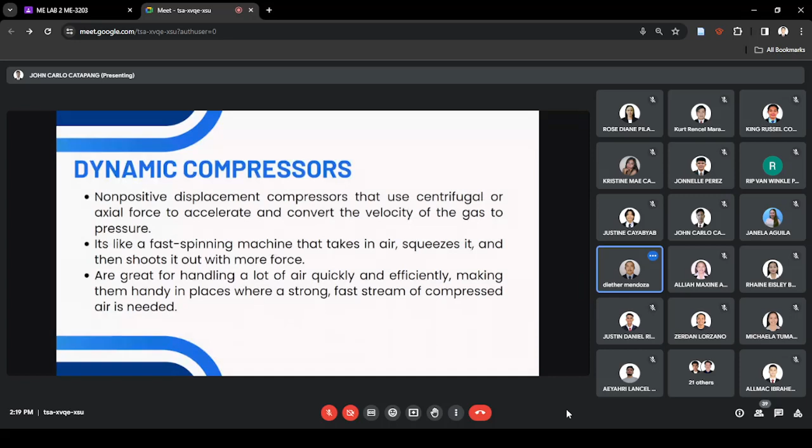First is the centrifugal compressors. A centrifugal compressor is a type of dynamic compressor that uses a rotating impeller to compress air or gas. For reference, you can go to page 108, figure 7.2.

Here's a simple breakdown. First is the impeller - imagine a fast spinning wheel with blades, that's the impeller. When it spins, it pulls in air or gas. Next is centrifugal force - as the impeller spins, it creates a centrifugal force that flings the air outward. Next is compression - the outward flung air is then directed into a diffuser where it slows down and the pressure is increased. This compressed air is then ready for various uses such as powering tools or industrial processes.

Next. Additionally, centrifugal compressors are known for their efficiency and reliability, and they are often used in applications where a continuous high volume flow of compressed air or gas is required. They are used in industries like petrochemical, power generation, and manufacturing.

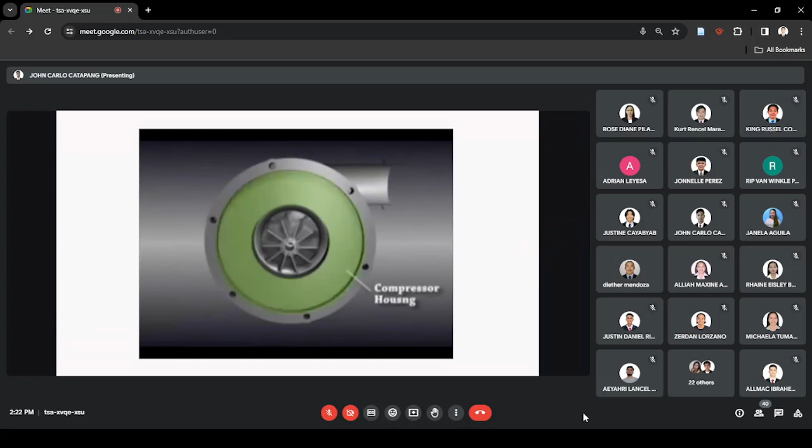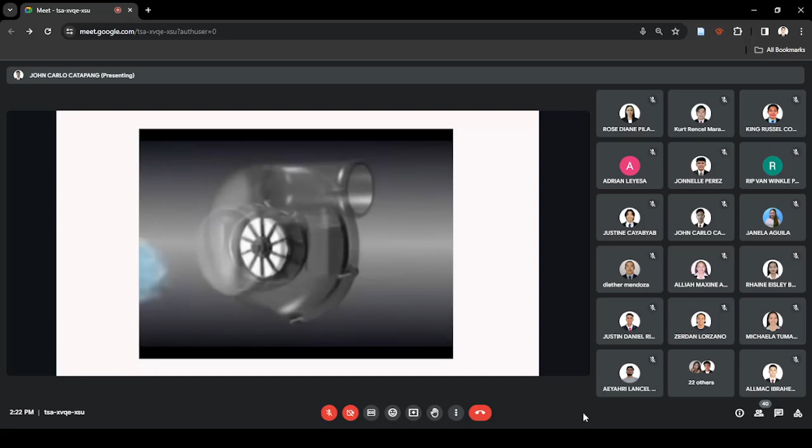And here's some video to explain it further. A centrifugal compressor is comprised of the following key components: compressor housing, impeller, ambient air inlet, outlet. A centrifugal compressor uses an impeller to draw in gas at the hub and accelerate it radially by centrifugal force through a circular looped housing. The housing acts as a diffuser that converts high-speed, low-pressure air leaving the impeller to high pressure, low speed air.

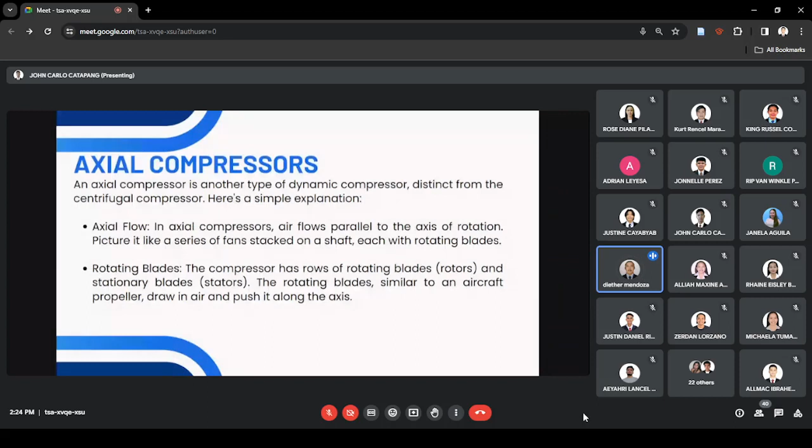Rotating blades: the compressor has rows of rotating blades called rotors and stationary blades called stators. The rotating blades, similar to an aircraft propeller, draw in air and push it along the axis.

Compression stage: axial compressors often have multiple stages, with each stage consisting of a set of rotating and stationary blades. As air passes through each stage, it gets compressed further.

High efficiency: axial compressors are known for their high efficiency, especially in applications where a continuous and high volume of compressed air is required. To add more, axial compressors are commonly used in aircraft engines, power plants, and certain industrial processes where a streamlined and efficient flow of compressed air is crucial.

However, it's not used as frequently as the reciprocating and centrifugal compressors because of its high initial and maintenance cost. All compressors can be rated by dividing discharge pressure by the suction pressure, and this is called the compression ratio. And here's another video to explain it further.

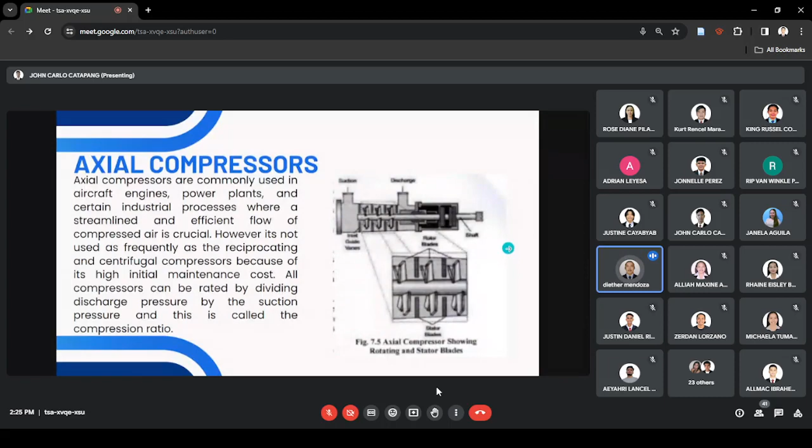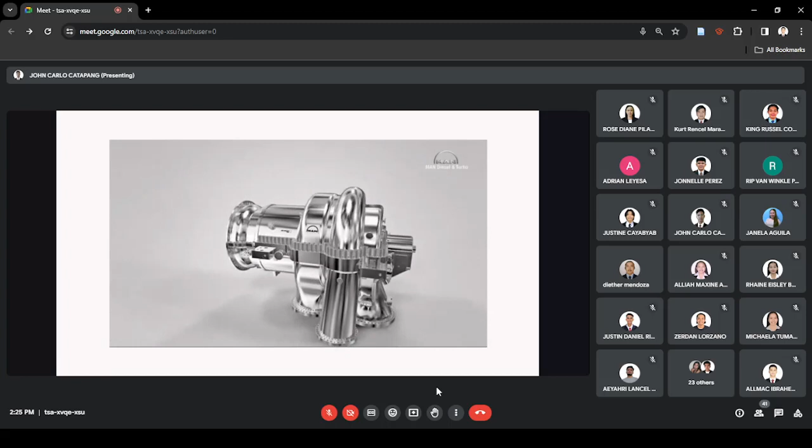MAN Diesel and Turbo is the world's leading supplier of industrial axial flow compressors. Various types of axial flow compressors are available to meet the specific requirements of different industrial sectors. Depending on the frame size, a single axial flow compressor may have a suction capacity of up to 1.5 million cubic meters per hour and be able to compress this flow to a maximum pressure of 25 bar. For example, all the air inside the Cologne Cathedral, which at 516 feet is the third tallest church building in the world, could be exhausted in around 16 minutes.

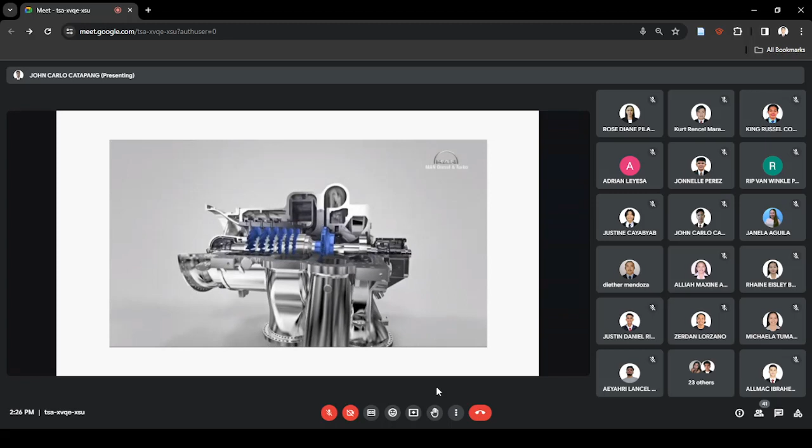The basic design of an axial flow compressor is similar to that of a fan. Blades are mounted around a shaft. In order to increase the effect, several of these blade rows are arranged axially, one behind the other. This axial stage group is often combined in a machine with one or more downstream radial stages in order to further increase the discharge pressure. A compressor of this type, such as the AR MAX1 shown here, is known as an axial radial compressor. The axial and the radial part are mounted on a common shaft, and the gas, normally air, flows through them in turn. An intercooler can be installed in between, which increases the efficiency of the compression process.

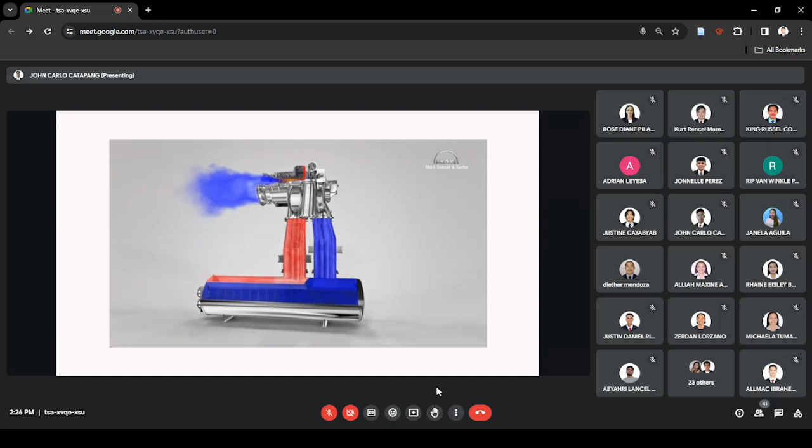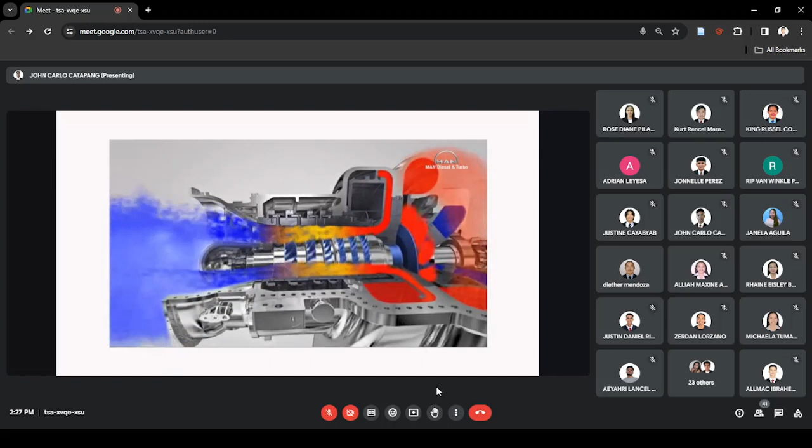Let's now take a look at the axial stage group. As they rotate, the blades strike the gas, guiding it backwards and also compressing it. This process generates a flow along the axis. That's why the machine is called an axial flow compressor. The outlet casing guides the compressed gas to the outlet nozzle.

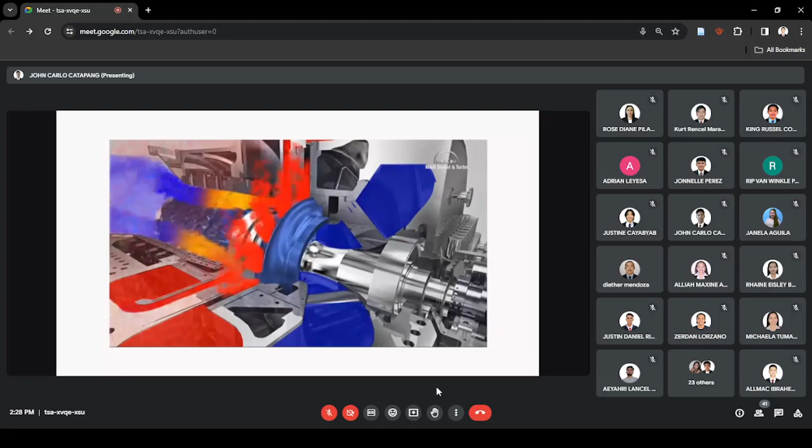Compression raises the temperature of a gas, which in turn somewhat reduces the density and increases the volume. As the downstream compression process would require more energy, the intercooler reduces the temperature of the gas before it enters the radial part. Axial flow compressors are able to compress extremely high volume flows, but the maximum feasible pressure ratio is limited. On the contrary, centrifugal compressors can only process lower volumes, but deliver higher pressures. Since the gas in the AR MAX1 has already lost sufficient volume through compression in the axial part, the downstream radial part is perfectly suited for bringing the gas to a high discharge pressure.

MAN Diesel and Turbo has been designing and manufacturing axial flow compressors since 1950, either in air separation, nitric acid production, as blast furnace blowers, or in refinery applications. These machines have been verified hundreds of times and proven over decades.

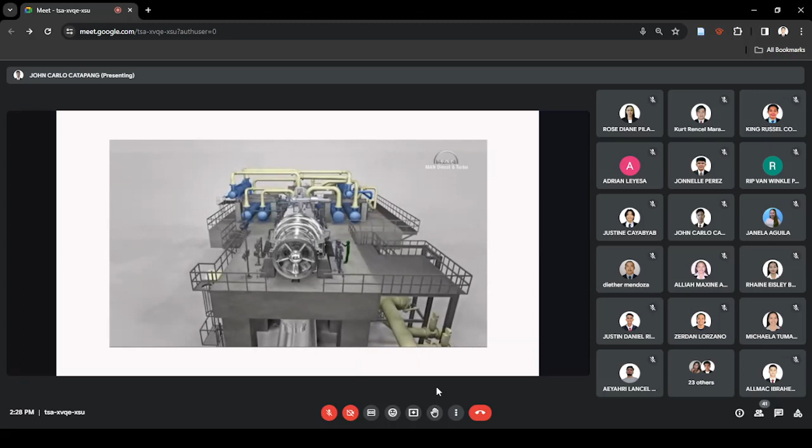Coal liquefaction is a future-oriented application that extracts synthetic fuels and other chemicals from coal. The process requires large amounts of oxygen. Large air separation units are therefore becoming increasingly important. To extend its leading position in this area, MAN has developed AirMax.

This compressor train consists of an AR MAX1 axial flow compressor as a main air compressor, an integrally geared centrifugal compressor, and a driving steam turbine in the middle. In its blading, AR MAX1 combines for the first time the benefits of conventional industrial compressors with those of aero engine compressors. This makes it extremely robust, as well as uniquely compact and efficient.

Next is the ejector, a device used to suck gas or vapor from the desired vessel or system. It is similar to a vacuum pump or compressor, but without the need for mechanical parts. Here is a simple illustration of the ejector.

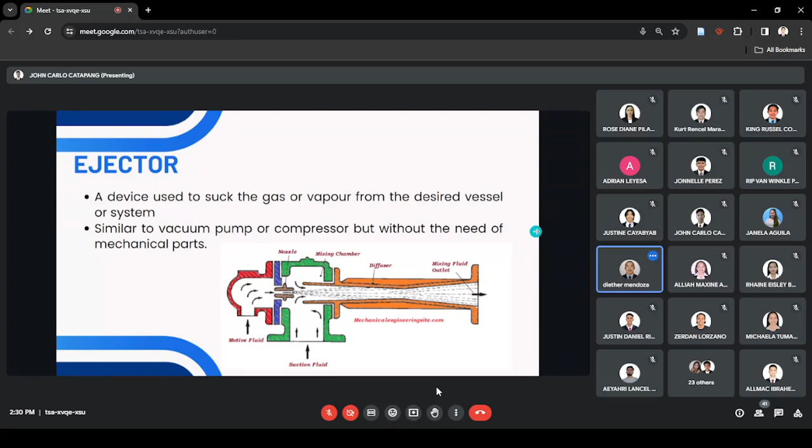An ejector is a device that uses a high-speed fluid, such as a gas or liquid, to create a low-pressure region and entrain another fluid or substance into the flow. Here's a simple breakdown: high-speed fluid flow - the ejector typically has a nozzle through which a high-speed fluid is expelled. This fluid can be steam, air, or another gas or liquid.

Next is the low pressure zone. As the high-speed fluid exits the nozzle, it creates a region of low pressure. This low pressure zone is where the ejector draws in another substance. Next is entrainment - the low pressure zone induces the flow of another fluid or substance, usually a gas or vapor, from the surrounding environment into the ejector.

Next is mixing and discharge. The entrained substance mixes with the high-speed fluid, and the combined flow is then expelled from the ejector.

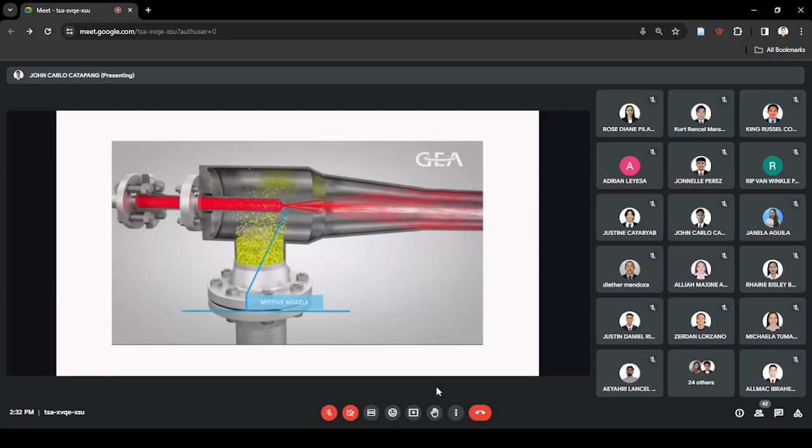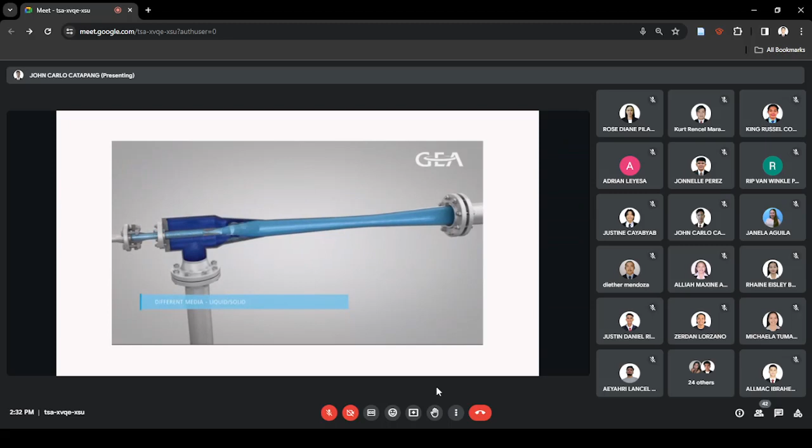The operational principles of jet pumps, also referred to as ejectors, is simple. The pumping effect is achieved using a motive medium, such as a gas flow. This generates a dynamic pressure drop in the motive nozzle. The resulting negative pressure accelerates the suction medium by impulse transmission in the mixing nozzle and pulls it along. Their simple technical design without moving parts makes jet pumps specially robust and low maintenance. The process works with gaseous and liquid media and, depending on the design, is capable of transporting gases, liquids, and even solids. Depending on the specific application, GEA produces jet pumps from various materials. We use different types of steel, plastic, graphite, and other special materials.

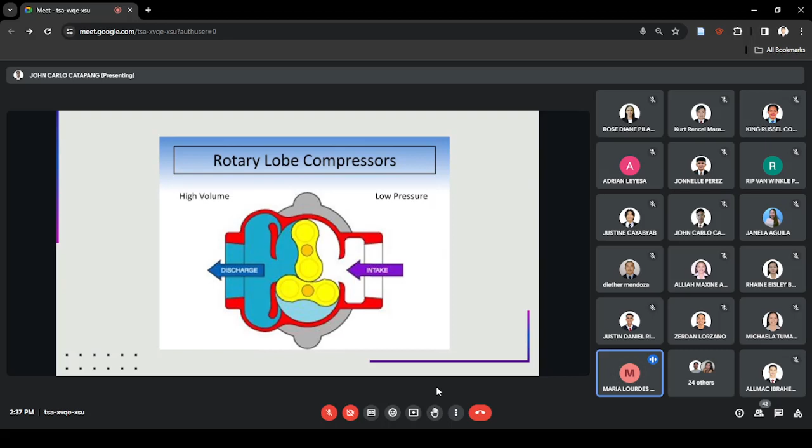Ayan, yun po yung example ng rotary lobe compressors. So sa lobe compressor naman po, nagko-consist siya ng two lobes na nagsiserve as their gears para mag-compress nung air or gas, yung yellow na part.

Another type ay rotary screw compressors. Rotary screw compressors utilize two helical screws or rotors rotating inside a cylindrical housing to compress air or gas. As the screws rotate, the air or gas is trapped in the spaces between the screws and the housing, forming a compression chamber. The volume of this chamber decreases as the screws continue to turn, compressing the air or gas. Finally, the compressed air or gas is discharged through an outlet port.

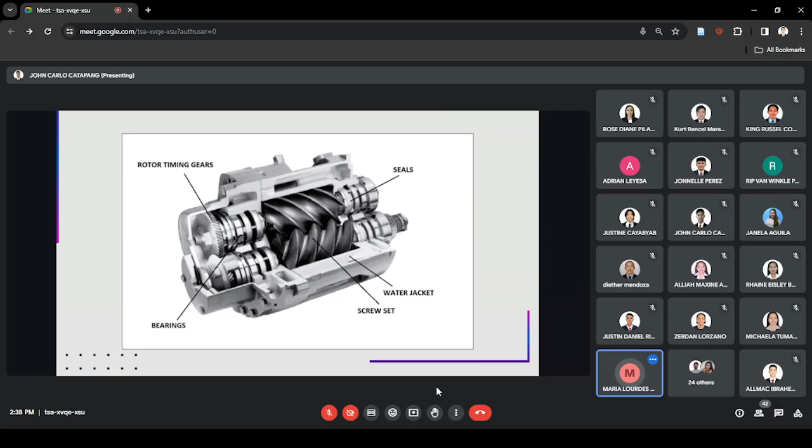So ito po, picture ng sample ng rotary screw compressor na may dalawang screw, which is also called the rotor. Yung isang rotor ay tinatawag na male rotor, at yung isa naman ay female rotor. Kaya sila tinawag na male and female kasi match or fit sila to work and to compress air or gas.

Another type is the liquid ring compressor. A liquid ring compressor uses a rotating ring of liquid, typically water, to compress gas or vapor. Inside the compressor, a cylindrical chamber is partially filled with the liquid, forming a rotating ring due to centrifugal force. Gas or vapor is drawn into the compressor, where it is entrained by the rotating liquid ring and compressed as it travels through the chamber. The compressed gas or vapor is then discharged at a higher pressure.

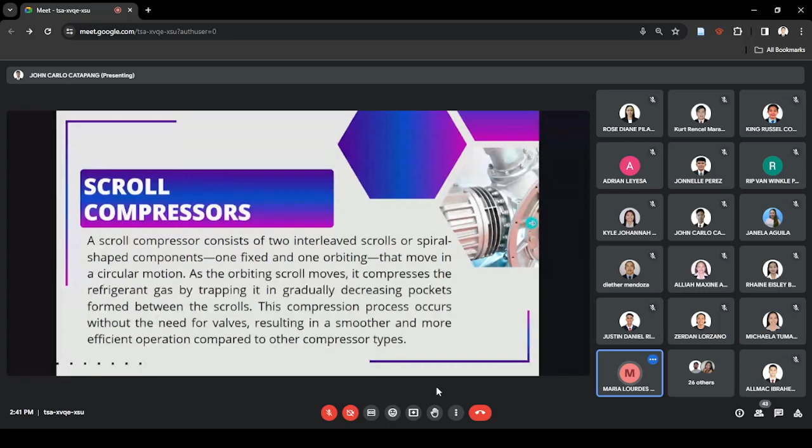So this is one example ng scroll compressor. Dito makikita natin na may dalawang scroll, yung fixed at yung isa ay yung orbiting scroll. Yung fixed scroll ay nakakabit sa loob ng compressor housing. Tapos yung orbiting scroll, siya yung umiikot ng circular motion na may connection dun sa fixed scroll. Habang umiikot yung orbiting scroll, lumiliit yung spaces between them, then nako-compress nila yung gas sa loob. And that's all for the different types of rotary compressors.

So, under pa rin ng positive displacement ay yung reciprocating compressors.

Reciprocating compressors, the term reciprocating refers to the back and forth movement of the compression device. Either a piston or other device is positioned in a cylinder. Ang keyword lang dyan is yung back and forth movement, which means merong intake stroke at yung outward stroke, wherein sa intake stroke, magdodraw ng gas into the chamber, then sa outward stroke naman ay magdi-discharge ng na-compress na gas. Ang idea rin ng reciprocating compressors is yung piston mag-receive ng power or force from the drive shaft and then ita-transfer nito yung power dun sa gas na iko-compress natin.

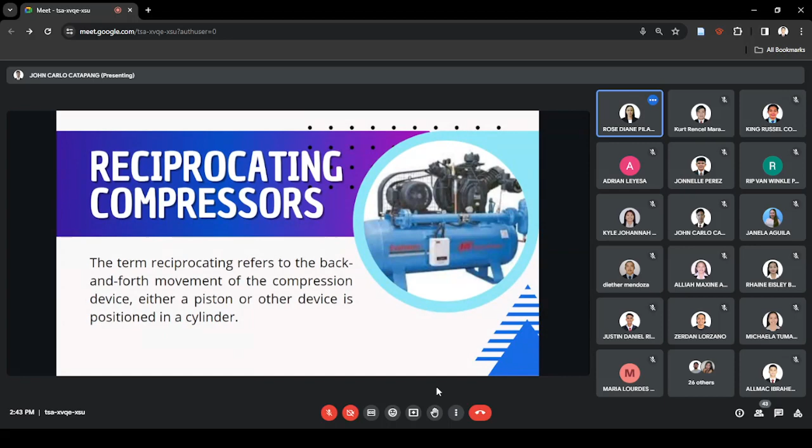Under reciprocating compressors are piston type compressors. Piston type compressors are the oldest and most commonly used compressor in the pneumatic industry because of its flexibility, high pressure capability, ability to rapidly dissipate heat of compression, and oil-free operation. They are built for either stationary or portable devices.

The idea in piston type is that the gas is trapped between the piston and cylinder head, and then it is compressed. To further explain, next slide.

There are two types of piston type: single acting and double acting compressor. In single acting, only one side of the cylinder compresses the gas, whereas in double acting, compression happens on both the outward stroke and the inward stroke.

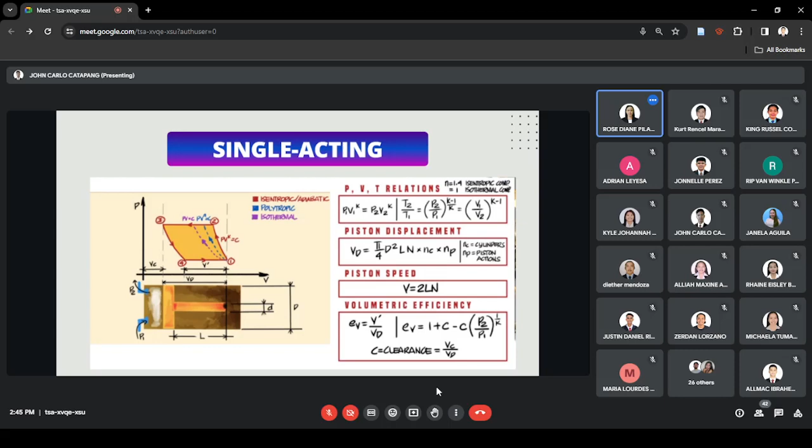When our piston moves down, it creates a vacuum in the cylinder which draws in gas from the inlet valve. Then when our piston moves up, the gas is compressed and pressure builds up. When the pressure rises, the outlet valve opens and our compressed gas exits the cylinder.

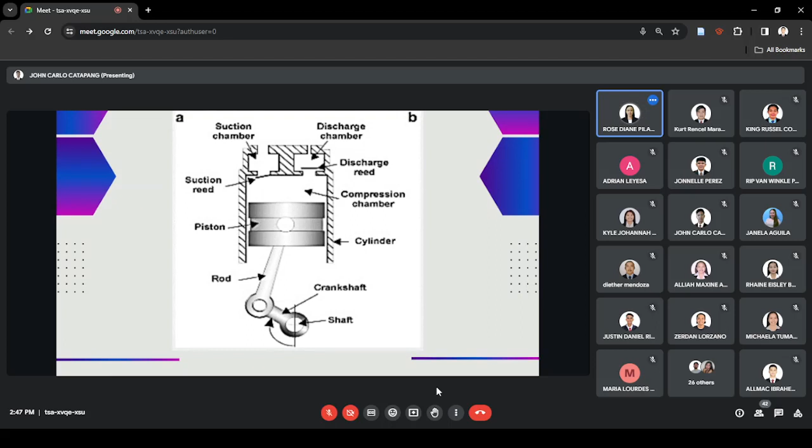Another type under reciprocating compressor is the diaphragm. The idea here is that it uses a flexible diaphragm to compress gas, made out of flexible materials such as plastic or rubber. Its application is for pharmaceuticals, medical, and laboratory use. The diaphragm acts as a barrier to prevent contamination of our gas from our drive mechanism, which is why it's applicable to pharmaceuticals since gas purity is critical there.

During the suction stroke, of course, air is taken in. The compensating pump delivers a low quantity of oil through the check valve towards the oil head. Then the piston ring leaks and the membrane approaches the oil head so that air can enter.

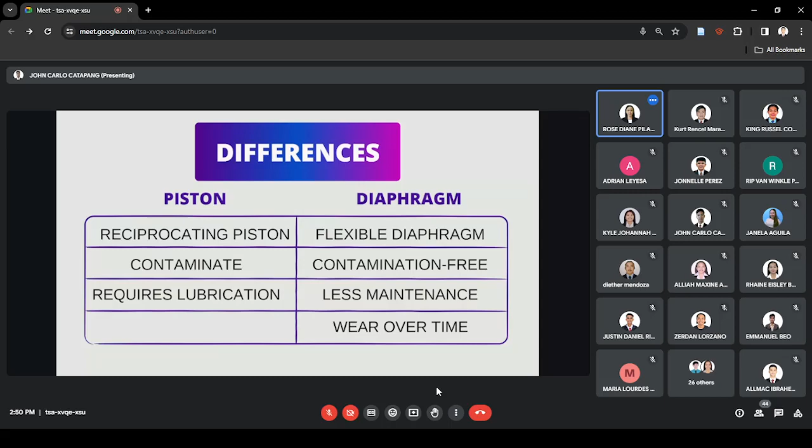For piston type, lubrication is required. For diaphragm, it requires less maintenance since lubrication isn't needed and the gas doesn't come in contact with the drive mechanism. However, the diaphragm wears over time, so it needs to be replaced periodically.

So, the other type is our trunk compressor. This type of compressor has a single acting cylinder and is limited to refrigeration service and to smaller air compressors. Here, the piston is directly connected to the connecting rod, so the limitation on rotational speed is less restricted, allowing higher speed.

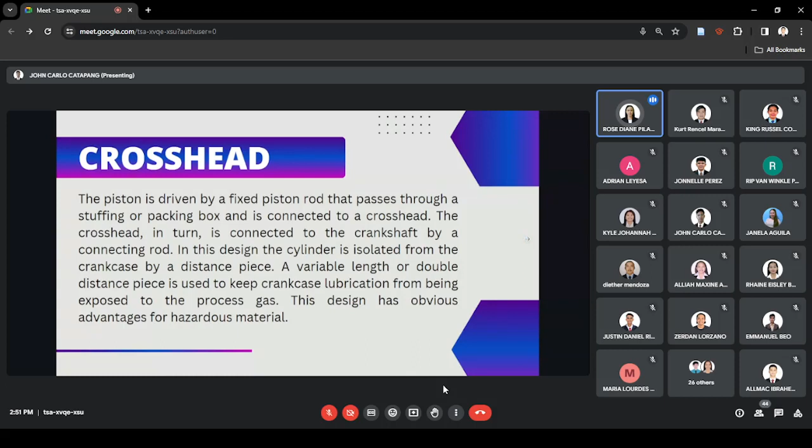For crosshead type, the piston is driven by a fixed piston rod that passes through a stuffing or packing box and is connected to a crosshead. The crosshead in turn is connected to the crankshaft by a connecting rod. So if earlier in trunk type the piston is directly connected to the piston rod or connecting rod, here in crosshead there's an additional component, the crosshead, that links the piston and the connecting rod.

The crosshead also provides the compressor with greater stability, providing less vibration and less piston ring wear and tear, thus allowing a double acting design instead of the single acting design in trunk type.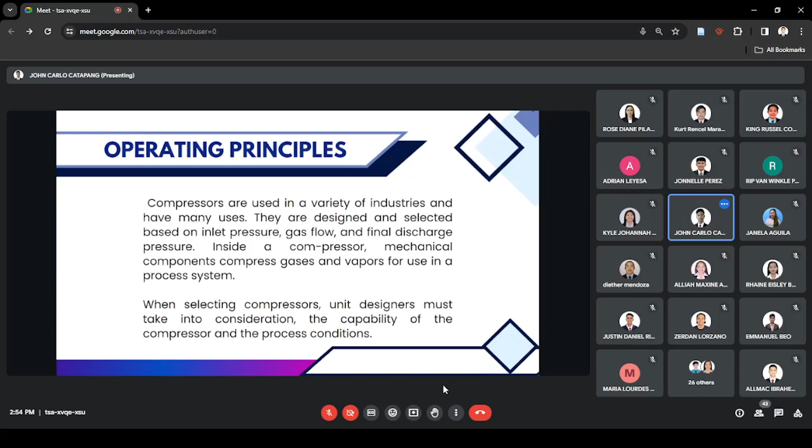Single stage versus multi-stage compressor. First is the single stage compressor. In a single stage reciprocating compressor, all the compression process takes place in only one cylinder. Two valves connect with the cylinder: one is an inlet or suction valve, and the other is an outlet or delivery valve. The opening and closing of a spring or plate valve vary based on the pressure difference. When mechanical valves are used for suction and discharge, their function is controlled through cams.

So in the single stage compressor, as Master Dian mentioned, here's the process of the piston. Once the piston slides down from TDC or the top dead center, the inlet valve opens and gases enter. Once there are gases in the cylinder, the piston slides up and compresses the gases into high pressure and high temperature. Once compressed, it exits through the outlet valve.

At saka outlet valve, nakakonekta ito sa ating storage tank. Paulit-ulit lang yung process hanggang sa mapuno na yung ating storage tank.

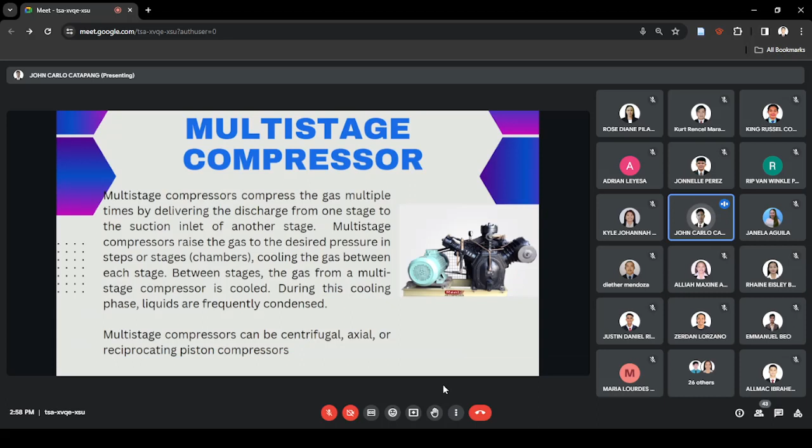Multi-stage compressor can be centrifugal, axial, or reciprocating piston compressor.

Centrifugal compressor performance curve. Para mas lalo nating maunawaan itong pag-monitor sa ating performance curve, ito ay dito.

Pressure, temperature, compressibility, molecular weight, and specific heat ratio of the gas at the compressor inlet and the machine's rotational speed affect the operating performance of centrifugal compressors.

For example, a compressor receiving inlet air at atmospheric conditions will develop higher discharge pressure on cold days than on hot days at a given rotational speed and inlet volume flow. The power requirement also will be higher.

Changes in atmospheric conditions such as relative humidity and barometric pressure will affect performance, although these factors are usually less significant than inlet temperature. We can account for these changes and others encountered during operation by modifying the performance curve of the compressor.

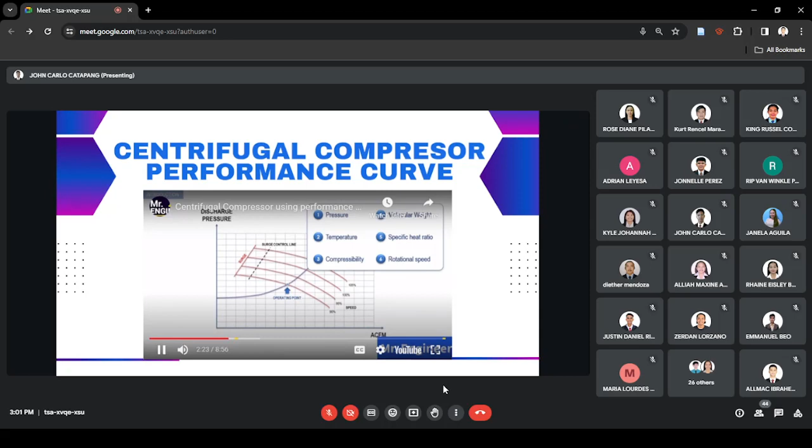In this section, we will develop application procedures for modifications to the performance curve for a single-stage centrifugal air compressor. Of course, these procedures are valid for any gases and for multi-stage centrifugal compressors with somewhat reduced accuracy as the number of stages increases.

Ang purpose nga ng ating pag-track ng performance curve ay para ma-monitor ng ating mga engineer kung may problema ba yung ating compressor, para malaman kung may singaw ba yung mga piston, kung may crack ba yung ating cylinder, at para matrack nga kung kailangan na bang palitan o kailangan na bang ayusin yung ating mga compressor. Yun yung purpose ng pagmo-monitor sa performance curve.

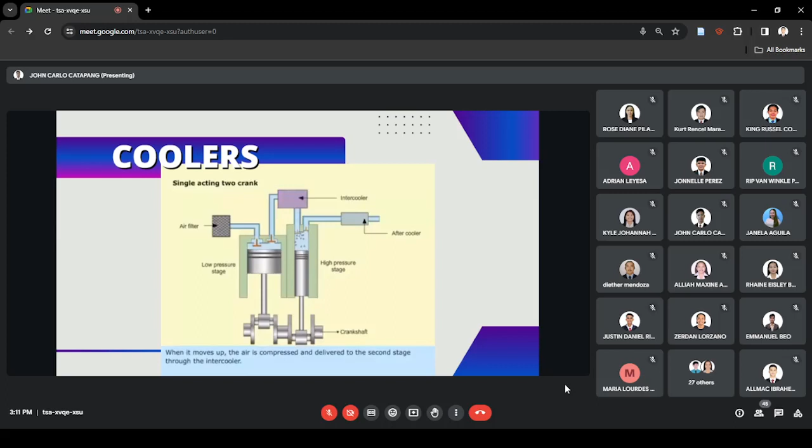In a single acting, two crank compressor, the low pressure and high pressure pistons are connected to two separate cranks. As the low pressure piston moves down, air is inducted through the air filter. When it moves up, the air is compressed and delivered to the second stage through the intercooler. The air is further compressed in the second stage and high pressure air is delivered through the aftercooler.

In a double acting compressor, compression takes place during the upward as well as the downward stroke of the piston. In this arrangement, the low pressure first stage piston is at the top and the high pressure piston is at the bottom. In the first stage, as the piston moves up, air is compressed and inducted into the second stage. When the piston moves down, the pressurized air is further compressed in the second stage. In the meantime, the low pressure stage inducts fresh air from atmosphere through an air filter. In this way, the process is cyclical.

In three-stage compression, the air is inducted at the first stage, compressed, cooled by the intercooler, and delivered to the second stage. In the second stage, the air is compressed further and delivered to the third stage. In the third stage, air is compressed to the required pressure and delivered through an aftercooler. When the piston moves up, air is compressed in the first and third stages, whereas air from the first stage is inducted into the second stage.

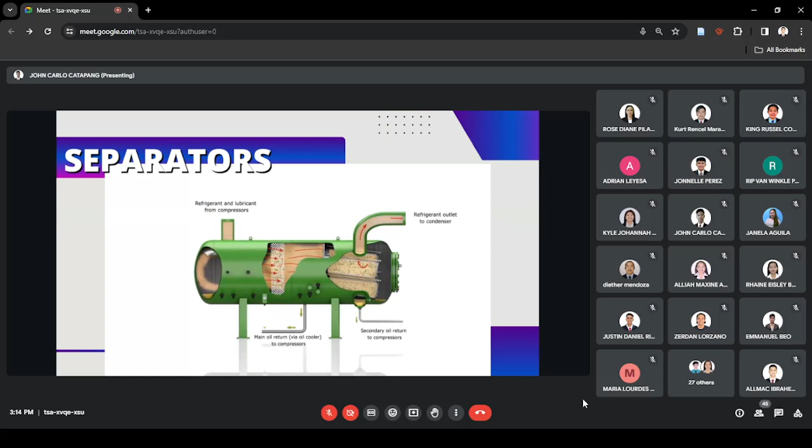Refrigeration oil is primarily separated in the first separation stage, thanks to centrifugal and gravity principles, which ensure maximum performance at both nominal and partial load. A second separation action then takes place in the demister section. Finally, a group of highly efficient coalescent filters provides the last step of oil separation.

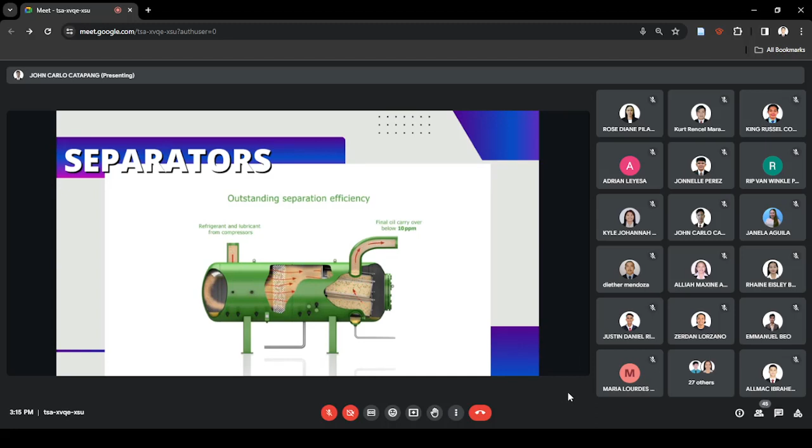Thanks to multi-step separation, the oil separator ensures outstanding separation efficiency. With a tested final oil carryover rate below 10 ppm, the oil separator ensures optimal compressor operation and minimum oil consumption. Optimized oil charge amounts and a service flange for simple filter replacement round off the benefits of the OAHC oil separator.

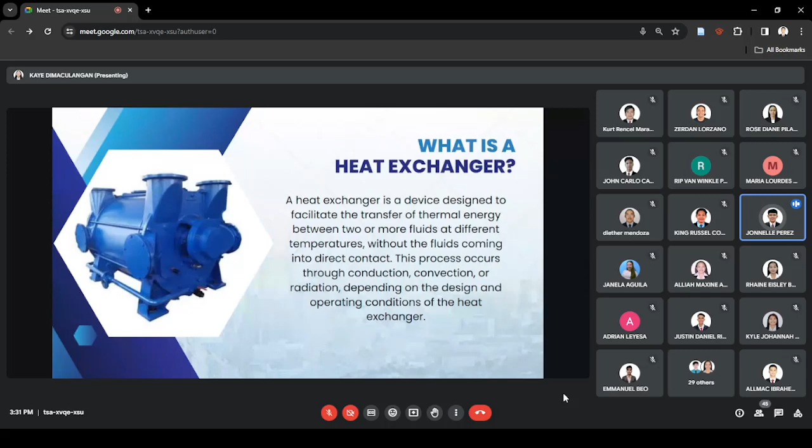And the purpose of the heat exchanger. Let's start with the purpose, which includes temperature control, energy efficiency, heat recovery, condensation and evaporation, and space heating and cooling.

For temperature control, our heat exchanger is in charge of temperature regulation in a process. This can be in industrial processes or any process or system that uses heat exchangers. The main job of heat exchangers in temperature control is to reach and ensure optimal operating conditions and maintain product quality in a system or engine.

Next naman po ay sa energy efficiency. Ang ating heat exchanger ay nagre-recuperate ng mga wasted heat mula sa ating exhaust streams or hot fluids na itinatransfer sa ating colder fluids. Ang heat exchanger po ay nagko-contribute sa energy conservation o kaya naman po ay pag-i-improve ng efficiency ng ating system o kaya naman po ay machines.

Next is heat recovery po. Kagaya rin po na na-mention sa ating energy efficiency, ito po yung pagre-recuperate ng wasted heat kung saan nare-recover natin yung thermal energy from the outgoing streams ng ating systems, kung saan nare-reduce po nito or nakaka-help po to ma-reduce ang energy consumption at saka operating costs ng isang system.

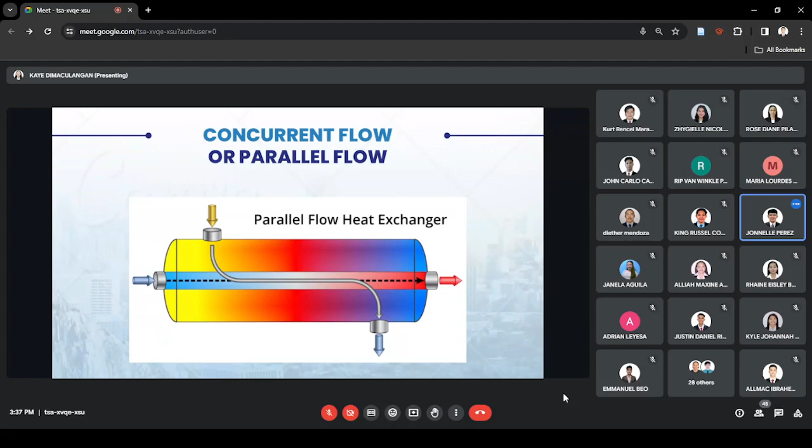Next naman po ay ang cross flow.

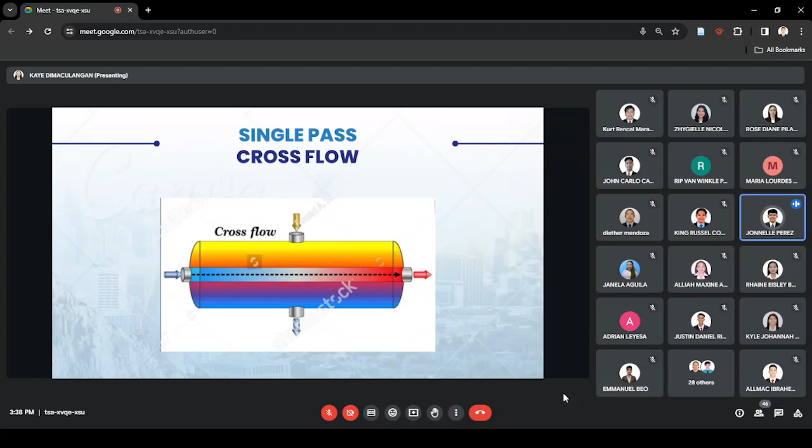Next naman po ay multi-stream flow or multi-pass cross flow. Sa isang multi-stream flow po, there are multiple streams. Kumbaga po ay iba't iba po ang makikita natin na flow configuration dito. Maaaring andito po lahat yung nabanggit kanina, which is yung parallel flow, counter flow, o kaya naman po yung single pass cross flow. So ito lang po ay parang incorporation ng unang tatlong flow configuration po ng ating heat exchanger sa isang device.

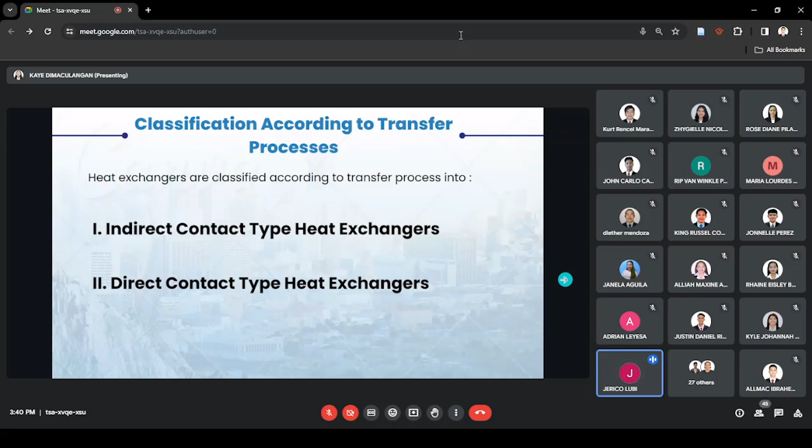The indirect contact heat exchanger operates by keeping the fluid stream separate while facilitating heat transfer through an impervious dividing wall or by transferring heat into and out of a wall in a transient manner. This means that the fluids involved never directly come into contact with each other during the heat exchange process.

Bale, ang tatandaan lang dito, separate fluid streams. Ang fluid ay segregated through the process. Hindi nagkakaroon ng direct contact ang two fluids sa heat exchange process. Tapos, impervious dividing wall, ito ay barrier na nag-aallow sa heat to pass from one fluid to other na hindi sila nagmi-mix.

Tapos, transient heat transfer. In some cases, the heat transfer might occur into and out of the wall in a transient manner. This means that the heat is absorbed or released by the walls, which then transfer it to the other fluid without direct contact between the fluids.

Next po. Ang sumunod naman ay direct contact type. Dito naman, ang two fluids ay nagda-directly touch each other to exchange heat. They are often used in processes like evaporation or cooling, where changing from liquid to gas or vice versa. Ang mga exchangers na ito ay nagtatransfer ng heat ng mas mabilis at hindi masyado expensive i-build. Pero since ang dalawang fluids ay nagda-directly touch, ito ay magagamit lang sa mga pwedeng gamitin na sitwasyon.

Sinasabi lang dito na ang classification according to process function, categorized heat exchanger ay naka-base sa specific roles in the thermal process kung saan ang condenser ay pang-convert ng vapor to liquid, heaters for increasing fluid temperature, coolers for reducing fluid temperature, and chillers for precise and low temperature cooling application.

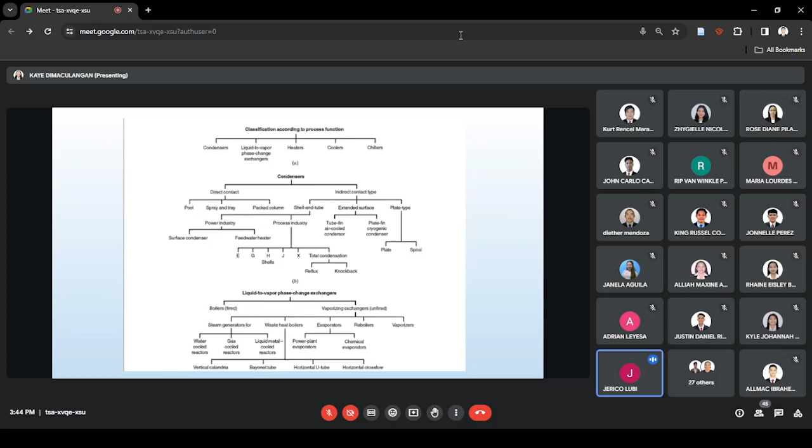Classification of heat exchanger by construction type. Heat exchangers can also be classified according to their construction features, for example, tubular, plate fin, tube fin, and regenerative exchangers.

Tubular heat exchangers are versatile and typically use circular tubes, but other shapes like elliptical or rectangular tubes can also be used. The design can be easily adjusted by changing tube size and layout. They are excellent for handling high pressure and pressure difference between fluids.

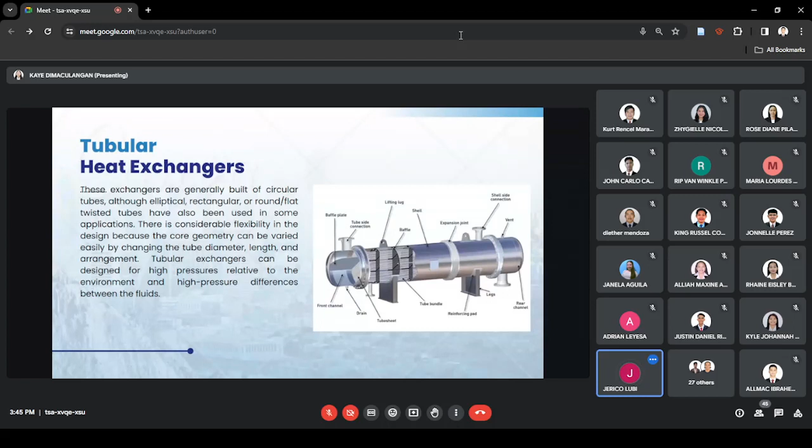Shell and tube heat exchangers will look something like this. With this design, we normally have for the heat exchanger what is known as the header. Then we have another inlet and outlet for fluid 2 on the main body known as the shell. Inside the unit we have the tubes. These bend and loop around to start and finish at the tube plate, which sits between the shell and the header. The tubes will usually also pass through some baffles, which are sheets of metal. We will see how these work in just a moment.

The header, as well as the tubes, can be removed for cleaning, repairs, and maintenance. Inside the header is a sheet of metal known as the divider, or the partition. This separates the tube ends, enabling the fluid to flow into and then out of the heat exchanger tubes.

Fluid 1 will flow through the header, into and around the tubes, then back to the header. Fluid 2 will enter the shell and surround the outside of the tubes. The baffles will partially block the flow, which will force the fluid to turn multiple times. This creates a turbulent flow and ensures that fluid 2 mixes with itself, which ensures maximum heat transfer.

For example, we might find this in a pharmaceutical factory with a boiler providing steam into the shell, which surrounds the tubes. A chemical product is then pumped through the tubes, and this absorbs the heat of the steam through the tube wall. So this product is going to exit the heat exchanger much warmer. Meanwhile, the steam will start to condense into a liquid and flow back to the boiler to pick up more heat and repeat the cycle.

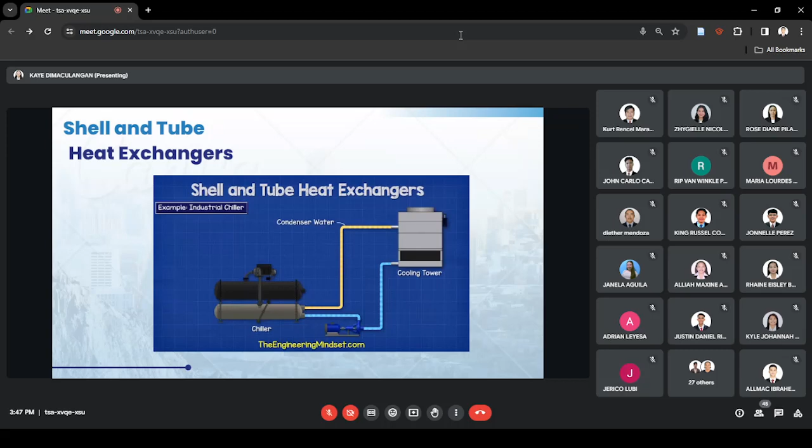Additionally, these are used in refrigeration applications, like this industrial chiller. We have the water flowing through the tubes, and the hot refrigerant in the shell. The water will absorb the heat of the refrigerant so that it can transport this to the cooling tower, where it will be rejected into the atmosphere. The water returns cooler to pick up more unwanted thermal energy from the chiller.

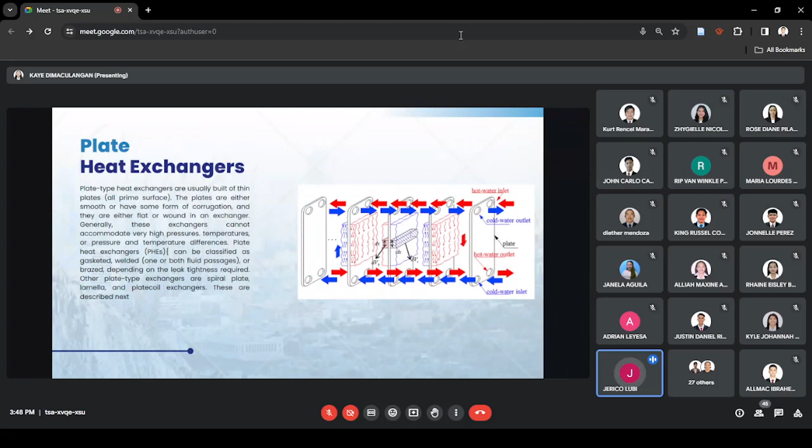Gasketed ones have flexible seals and are easy for cleaning. Welded ones are durable for higher pressure, and brazed ones have strong bonds between plates. Other types include spiral plate, lamella, and plate coil, each having its own advantages.

Another type is the plate fin heat exchanger. This is a device used to transfer heat between two fluids and consists of alternating layers of flat plates and corrugated fins, providing a large surface area for heat transfer. The fluids flow in separate channels formed by the plates and fins, with the heat transferred between them through the walls of the plate. The plate fin heat exchangers are favored for their high efficiency and compact design, making them suitable for various applications like aerospace, automotive, and HVAC systems.

As for its working principle, there are two fluid flow streams, typically hot and cold fluid, and they will enter the heat exchanger through separate channels. Heat is transferred between fluids through the thin fins and connected plates, and the large surface area of the fins facilitates efficient heat transfer. The plate fin heat exchangers often use a counterflow arrangement in which the hot and cold fluids flow in opposite directions. This arrangement gives higher efficiency to the heat transfer.

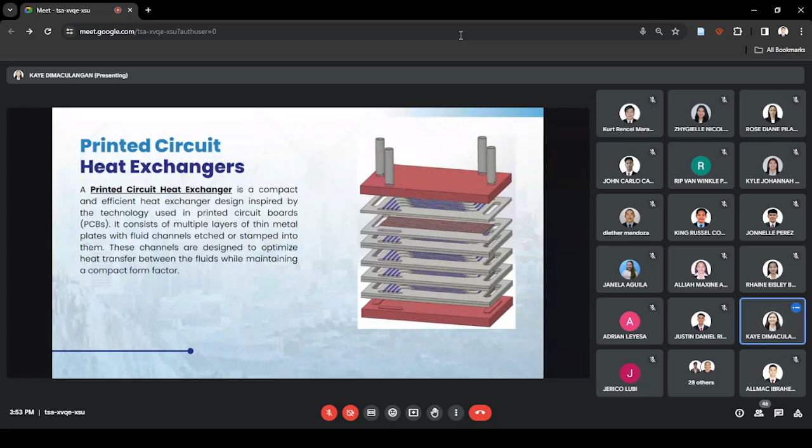Heat transfer occurs as the fluid flows through the channels within the printed circuit board. The close proximity of fluids within the microchannels enhances the convective heat transfer between them, allowing efficient thermal energy exchange. Printed circuit heat exchangers are commonly used in aerospace, automotive, and chemical processing industries. And last is the regenerative heat exchanger.

It is a type of heat exchanger that uses a matrix or bed of material with high heat capacity to transfer heat between two fluid streams. It operates in cycles, with one fluid stream passing through the matrix absorbing heat while the other fluid stream passes through and releases heat into the matrix. Then in the next cycle, the roles of the fluids are reversed. This allows for efficient heat exchange between the two streams with minimal temperature difference.

The heat transfer process occurs in cycles, typically in a counterflow arrangement. Then the roles of the fluid streams are reversed, allowing for efficient heat exchange with minimal temperature difference between the streams. Its application is used where energy efficiency and heat recovery are critical, such as in industrial processes, power generation, and HVAC systems.

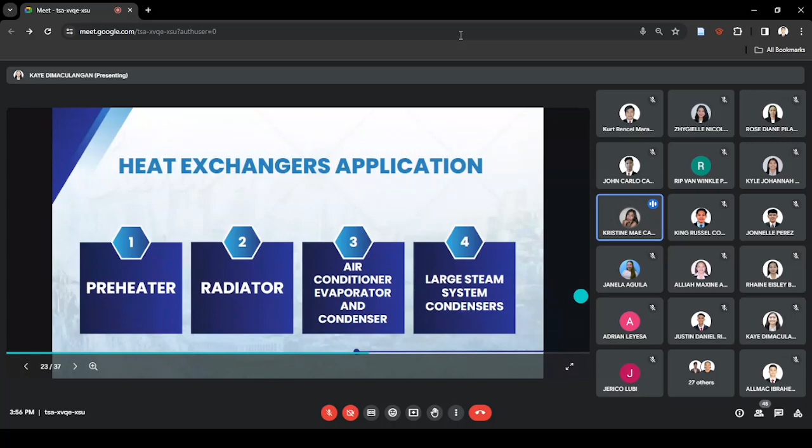For application sa preheater, ang preheater sa isang heat exchanger ay isang stage o component within the heat exchange system responsible para mapataas ang temperature ng fluid bago ito pumasok sa primary heat exchange process. In simple terms, parang warm-up stage para sa fluid to increase the temperature at ma-prepare for more efficient heat exchange within the main part of the heat exchanger.

Ina-ensure sa stage na ito na nasa appropriate temperature ang fluid bago pumasok sa main heat exchange section ng system to help optimize the performance. Sa mga large systems o any process na kailangan ng high temperature, common practice na mag-preheat muna in stages ng fluid for more efficient transfer of energy from the heat source to the fluid being heated.

For example, dito sa U-tube feed water heat exchanger, which is a type of heat exchanger na kadalasang ginagamit sa mga steam power plants or industrial boiler, and also classified as a preheater, ang function nito ay ma-preheat muna yung feed water bago pumasok ng boiler from ambient temperature to required boiler temperature.

Ang process nito ay yung steam ay papasok sa top ng heat exchanger surrounding the tubes, and habang dumadaloy ang steam around the tubes guided by baffles para sa path ng flow na parang pa-curve, ita-transfer ni steam ang thermal energy to the cooler tubes para ma-condense into liquid water. At yung process na ito ay nagre-release ng latent heat of vaporization, further heating the tubes.

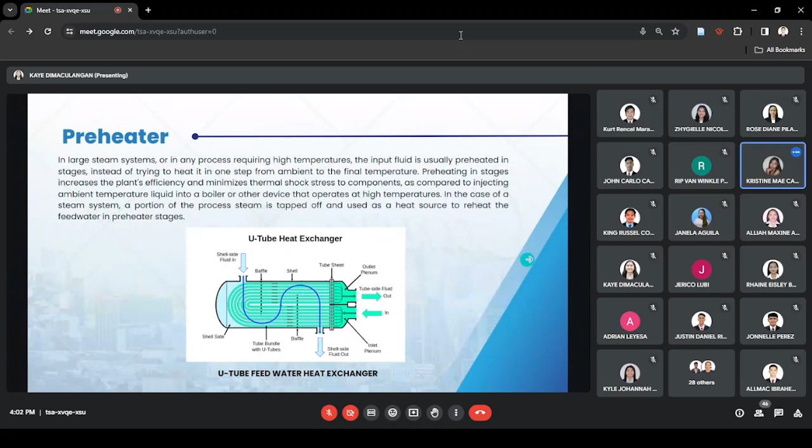Lalag lang pala. For the next application naman ay para sa radiator. Ang radiator ay isang type ng heat exchanger na kadalasang ginagamit sa mga cooling systems to transfer heat from a hot fluid to the surrounding air. In vehicles such as cars or trucks, yung radiator ang vital component ng cooling system responsible for dissipating heat generated by the engine.

Yung process dito sa radiator, meron siyang hot coolant na galing sa engine and dadaloy siya sa radiator through inlet pipes. And this coolant absorb heat mula sa engine na kailangang mag-cool down.

Inside sa radiator, magfo-flow na yung hot coolant through a series of narrow tubes habang yung air naman ang dadaloy sa exterior ng tubes either nagaling sa motion ng vehicle or sa help ng fan. At habang nagsisirculate ang hot coolant sa tubes, matatransfer ang heat mula sa coolant papunta sa metal ng tubes. At yung airflow na nagpapas sa tubes ay absorb ang init na nagkakos sa coolant para mag-cool down.

Kadalasan meron ditong thin metal fins sa radiators na naka-attach outside the tubes. These fins increase the surface area of the radiator, facilitating more efficient heat transfer between ang coolant at sa air. At after ma-release na yung heat dun sa radiator, yung cooled na coolant ay lalabas na through outlet pipes and babalik siya sa engine para mag-absorb ulit ng heat at dun makukompleto yung cooling cycle.

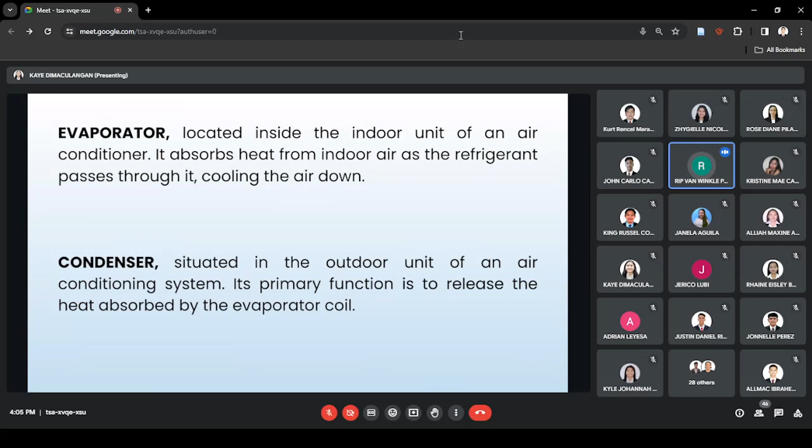In contrast, the condenser is situated in the outdoor unit of an air conditioning system. Its primary function is to release the heat absorbed by the evaporator coil as the refrigerant flows through the condenser coil. It expels the absorbed heat to the outdoor air, causing the refrigerant to condense back into a liquid form. In summary, the evaporator absorbs heat from indoor air to cool it down, while the condenser releases this absorbed heat to the outdoor environment, working together to maintain a comfortable temperature indoors.

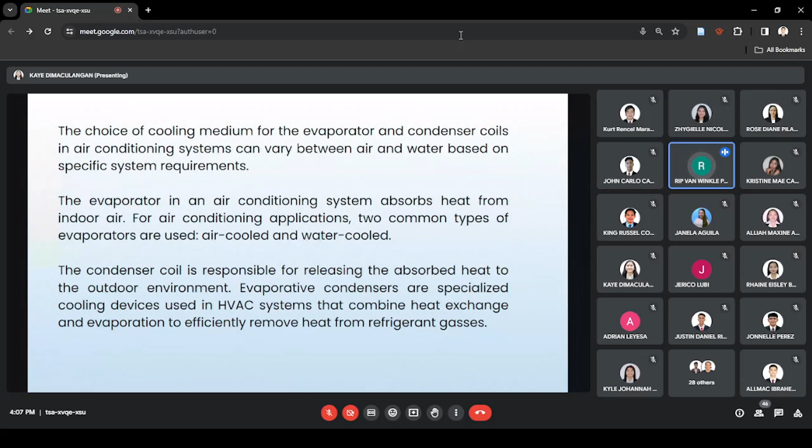In conclusion, the selection of air or water as the cooling medium for evaporator and condenser is based on specific system requirements, with each medium offering distinct advantages in terms of efficiency, energy savings, and cooling capacity. Next slide.

The last application of heat exchanger is large steam system condenser. A steam condenser is a crucial component used in various applications, including power generation and brewing, to convert steam back into water. A steam condenser is a base closed vessel type heat exchanger that converts low pressure exhaust steam from turbines back into water by removing its latent heat of vaporization. This process is essential for maintaining efficiency and reusing clean condensate in power plants.

There are two essential reasons why a steam condenser is a necessary component of the steam cycle. First is efficiency improvement. The steam condenser plays a crucial role in increasing the efficiency of the steam cycle by allowing the system to operate with the largest possible temperature and pressure differential. By converting used steam back into water for return to the steam generator or boiler as feed water, the condenser lowers operational costs by enabling the reuse of clean and treated condensate. Additionally, it is far easier to pump liquid water than steam, contributing to overall system efficiency.

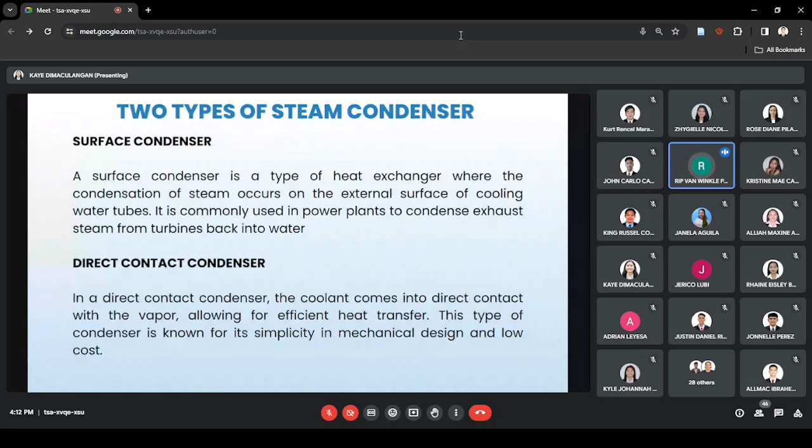In summary, while surface condensers are more common in power plants due to their efficiency and separation capabilities, direct contact condensers offer advantages in terms of cost effectiveness, simplicity, and versatility in different applications like water distillation and chemical engineering. The choice between these two types depends on specific requirements such as efficiency goals, cost consideration, and the need for direct contact between the coolant and vapor. Next slide po.

Key components include the condenser, a condensate extraction pump, and a hot well for condensate collection before returning to the boiler. Condenser efficiency is measured by the ratio of actual temperature increase to maximum possible increase. Next slide po.

The temperature and flow rate of cooling water through a condenser affect the condensate's temperature, which in turn affects its saturation pressure or vacuum. To prevent the condensate level from rising to lower tubes, a hot well level control system is used. This involves varying the flow of condensate pumps, controlling the speed of the pump or discharge flow control valve position, or using an overflow system.

However, it is impossible to prevent the entry of air and non-condensable gases into the condenser. To establish and maintain condenser vacuum, an air ejector or vacuum pump is needed. Next slide po.

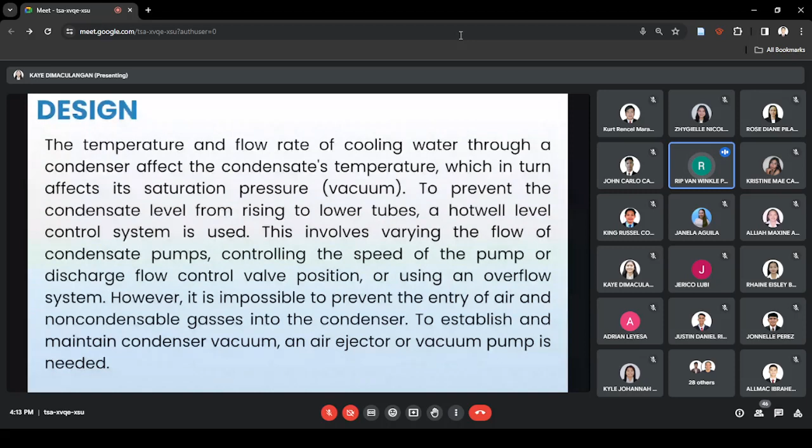A single-stage air ejector can draw a vacuum of about 26 inches mercury using steam at a pressure between 200 psi and 300 psi. Air ejectors typically consist of two suction stages. The first stage suction on top of the condenser, and the second stage is suction from a diffuser of the first stage. The exhaust steam from the second stage must be condensed by an air ejector condenser, which is cooled by condensate and preheats the condensate returning to the boiler. Two-stage ejectors can draw vacuum to 29 inches mercury. That's all po.